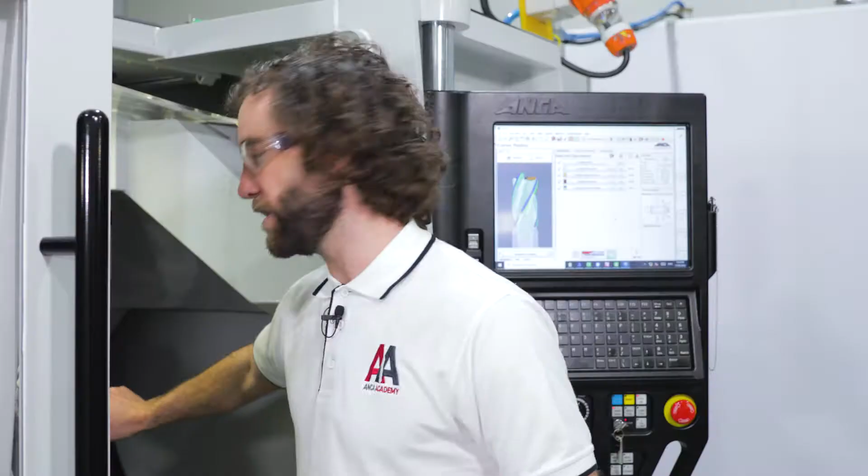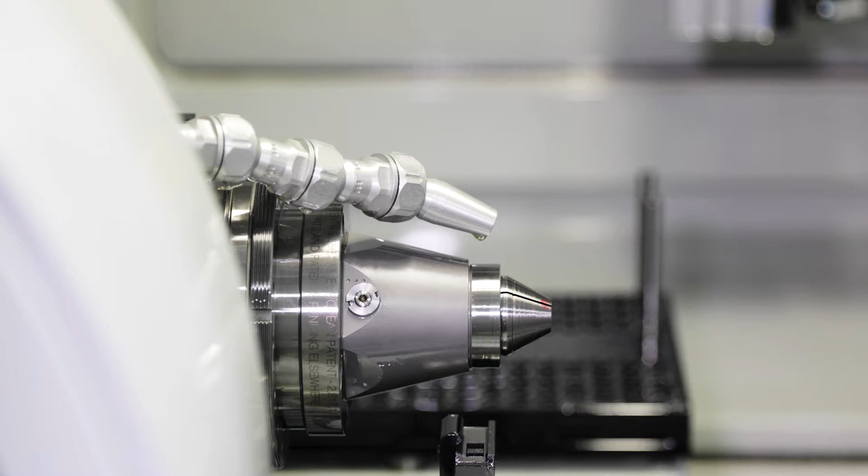The first step in our machine setup is the work holding setup. Today I'm using a W25 Premier Plus PCA collet adapter, and this is a great work holding system for grinding round tools because it gives us plenty of clamp force and also allows us to adjust out any radial or axial run out. I've already set this unit up here today, so I won't be going through that, but if you check out episode 1 of the ANCA Academy, we cover this in detail from start to finish, so I encourage you to do that.

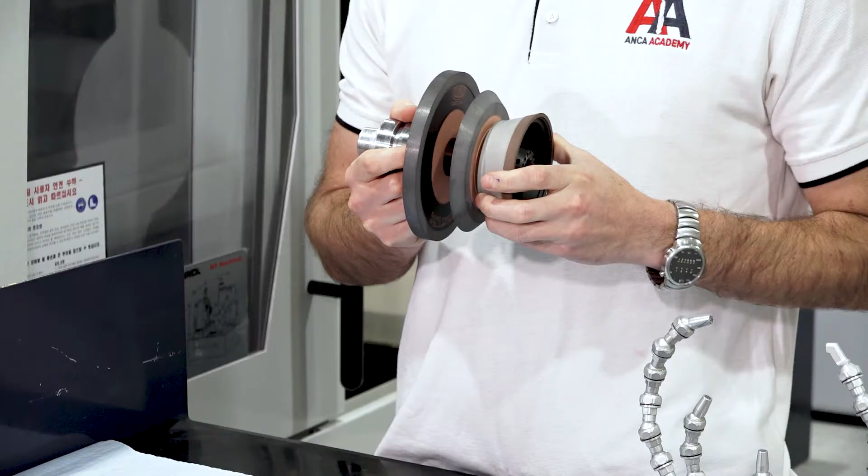Next up, wheel pack setup. I'm holding here a wheel pack very similar to the one we set up in the previous episode. It has the same wheels, the 1A1, the 1V1, and the 11V9, in the same configuration. This is a very flexible wheel pack, it can be used to grind a wide range of tool types. Today we'll be using this 1A1 to do the fluting operation and the plunge heel clearance. We'll be using the 1V1 to grind the gash, and then the cup wheel to do the primary relief on the OD and ball. This is not the only wheel pack that you could use to grind this tool. You do have several options when choosing a wheel for a given operation, but this is a very standard configuration, so that's what we'll be using today.

I'm going to leave this wheel pack here, and now we'll move over to the machine and get started designing our tool using the Wizard.

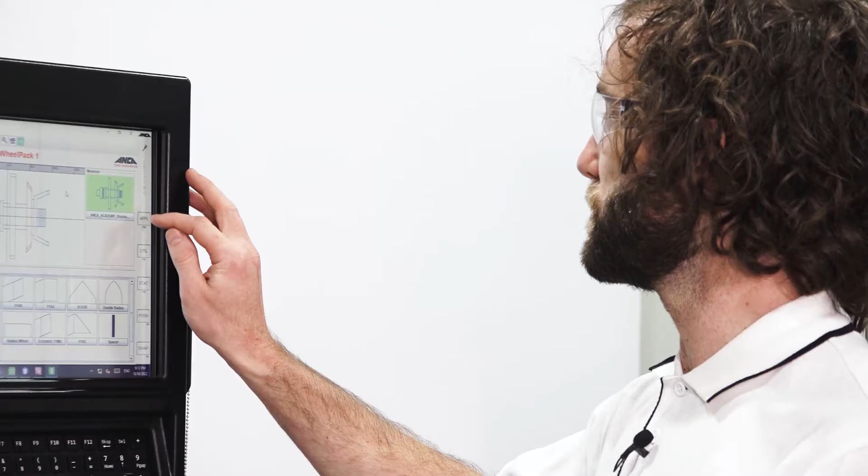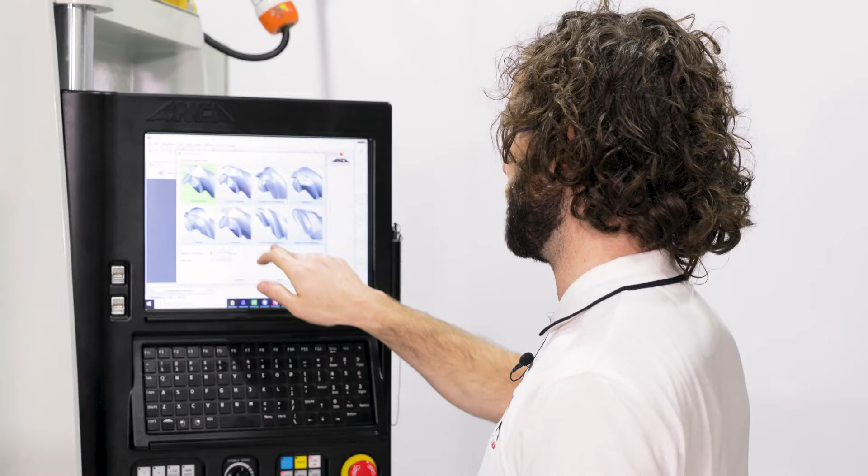Now that we have our work holding set up and our wheel pack mounted and qualified in the wheel editor software, we're going to generate our tool file using the Wizard. First, we'll open iGrind and select Create a Tool using the End Mill Wizard. To create a barrel-shaped ball nose, we actually use the oval form ball nose option. Again, 4 flutes, a 5mm radius, a 10mm diameter. We're going to be manufacturing from solid with a helix, and the material is tungsten carbide.

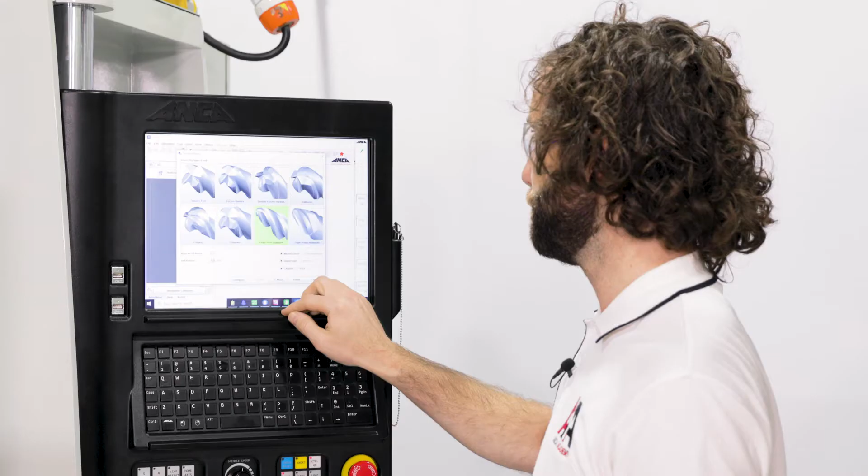Next window, this takes us to our oval form editor window. Here we can define the shape of the barrel-shaped ball nose. We have a few parameters here that we can choose to change this shape, but we'll just leave it as default.

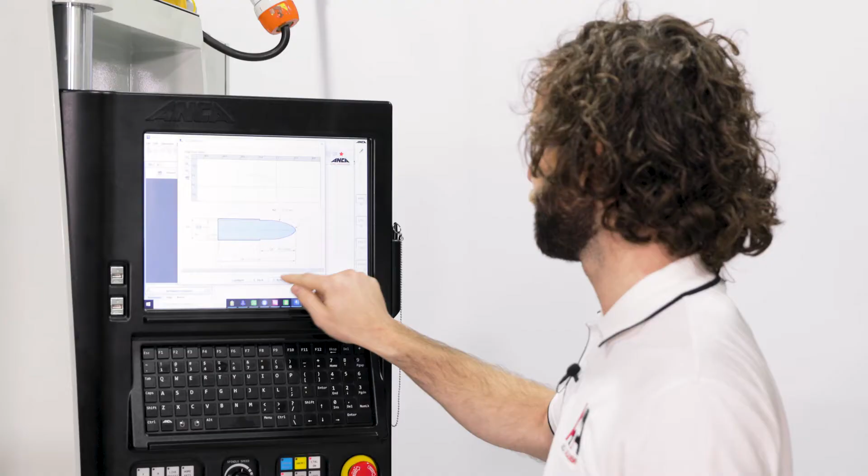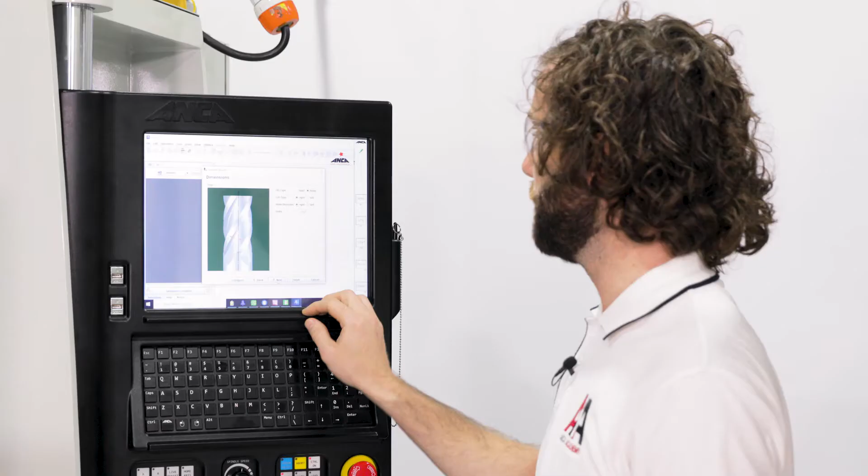Next is the end face style, much like the other end mill types. Here we're going to go with two long, two short. We have a few other options, but we'll stick with the default. Yes, it's a helix, OD, right-hand cut, right-hand helix with a 30-degree helix angle. We have a couple of other options here, unequal flute spacing and the feed rate override, but we'll leave that all as default for today.

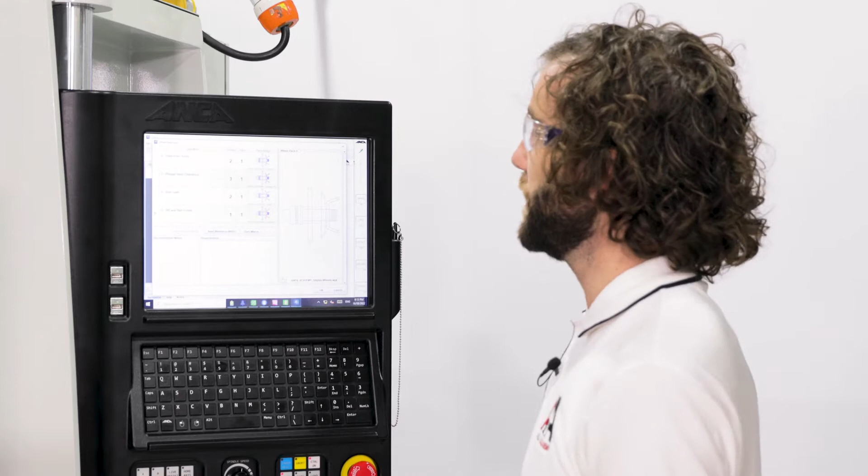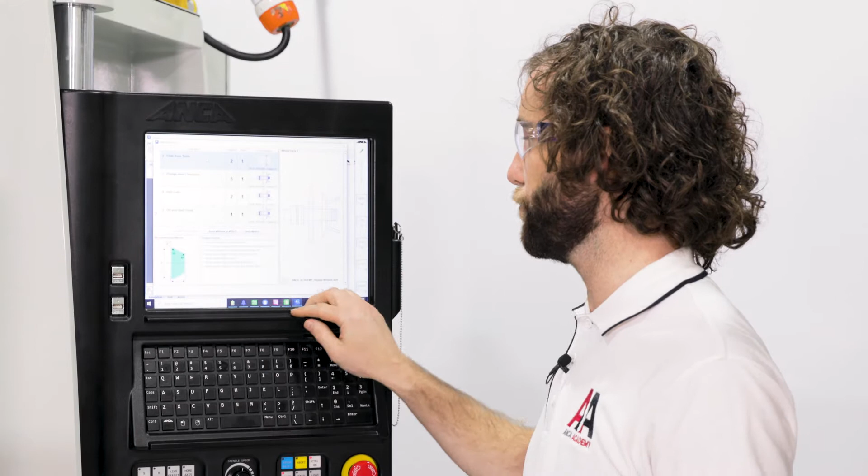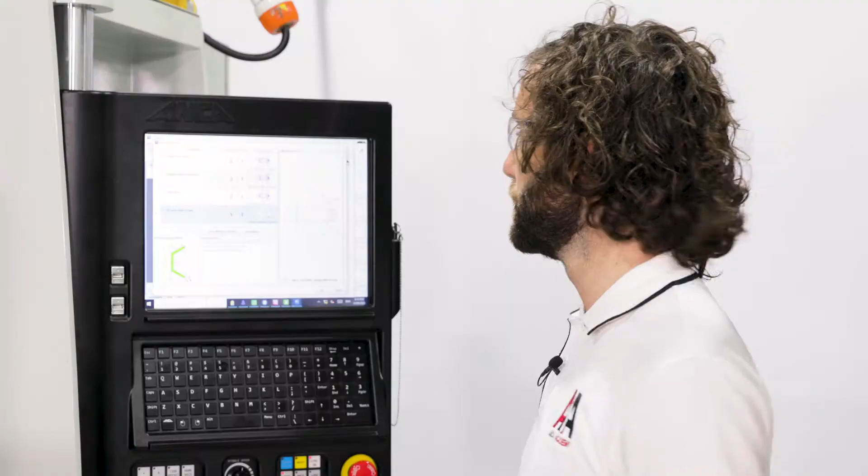Generating our tool, the next step is the wheel selection window. iGrind will automatically assign a wheel to an operation based on its suitability. For a given operation, we have a few requirements of the wheel, and it will pick the wheel that satisfies those requirements. Sometimes you might not satisfy all the requirements, and you might see for a particular operation that it's highlighted yellow. This means that although you can still grind that operation, you might end up with geometry slightly different to what's programmed. The other thing you might encounter is if it's highlighted in red. That's an invalid wheel, and you need to select a different wheel because it won't even grind the operation in that case. Here we have no yellow, no red. We've chosen our wheels well, so we'll check OK.

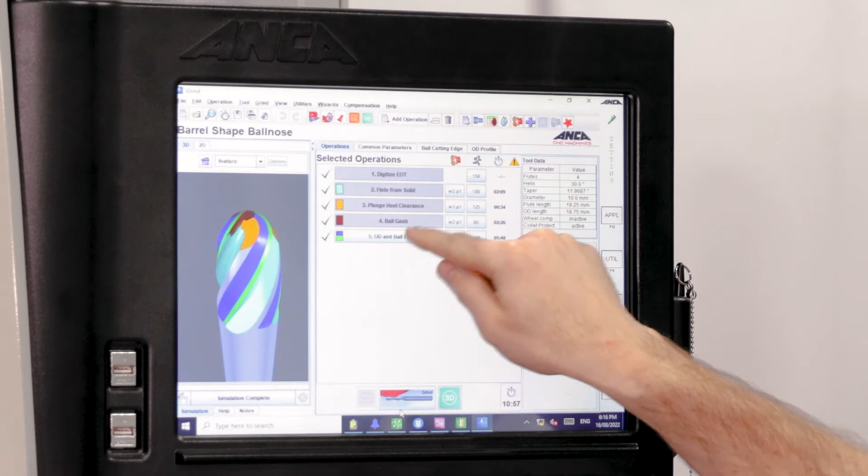OK, this is our tool file. We can see here in the simulation window what it's going to look like. To the right of that is the operation list, starting with the digitized end of tool operation, moving through flute from solid, plunge heel clearance, ball gash, OD and ball finish. Now in each of these grinding operations, we have many parameters which define the geometry for that operation. I won't go into any detail on any of the specific parameters today. We're just going to use the defaults as given to us from the Wizard, so all these parameters have been selected by the Wizard.

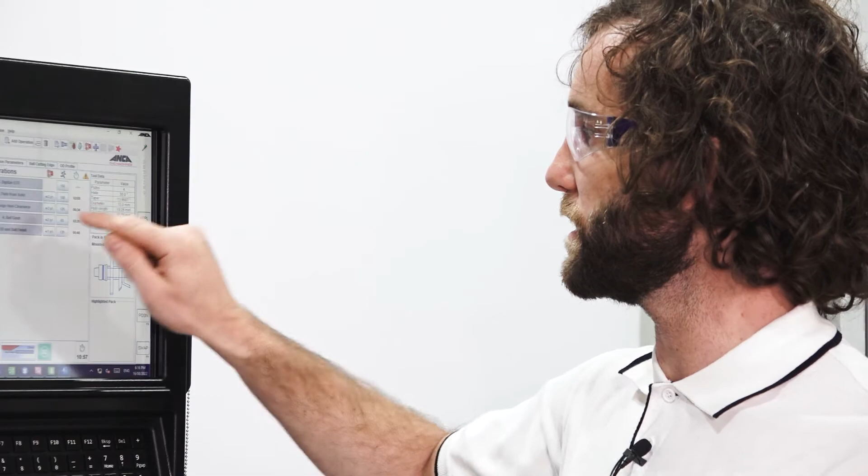So that's what we're going to use today to grind our tool. To the right of the operation list is the wheel selection. Here, for every operation, we can manually select wheels, different to what was automatically assigned in the wizard. Now, we're not going to change any of the wheels because the setup is good at the moment, but here is where you would go to change any wheels if you wanted to.

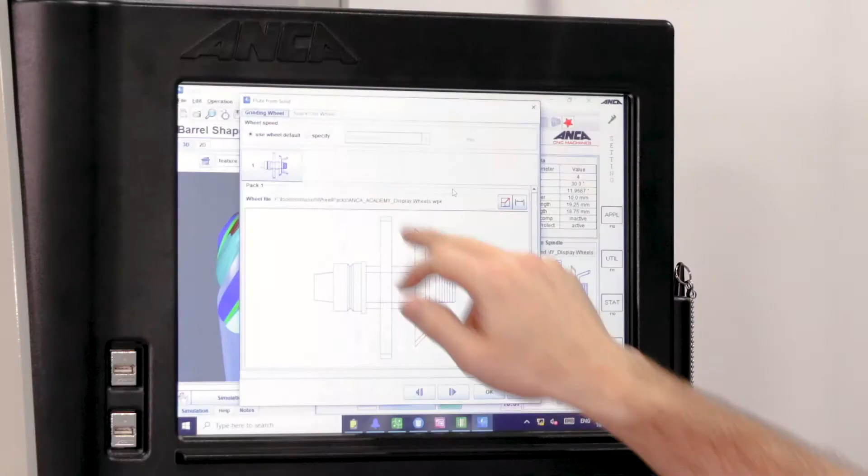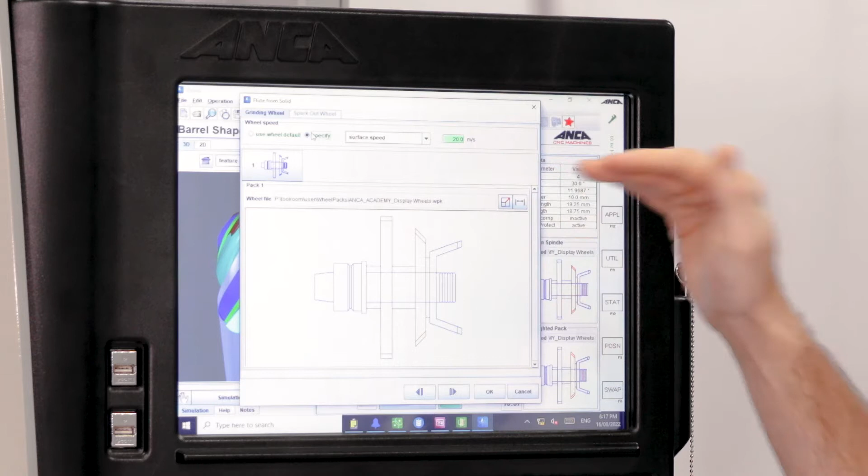Also here, we can define the wheel speed. Right now, we're taking the wheel speed using the default, which is defined in the wheel editor for a given wheel. But you can manually specify the wheel speed either as a surface speed or as an RPM. So we'll go back to the default here. And this wheel selection can be done for all of your operations.

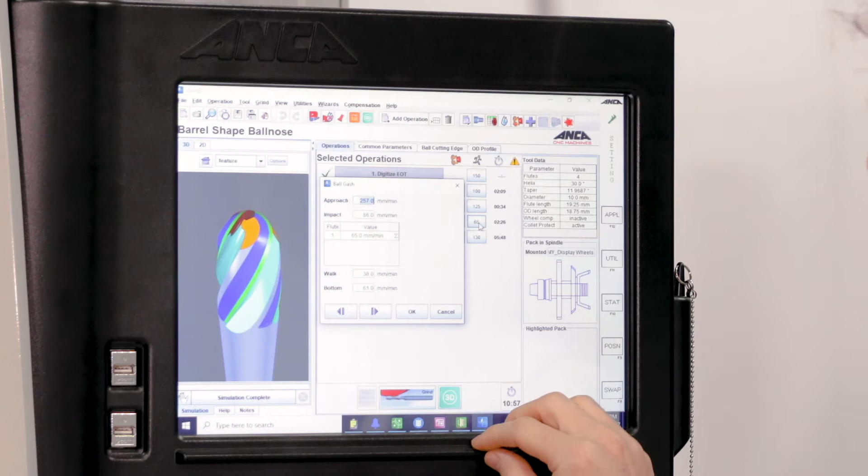To the right of this, we have the feed rate. Now here we can select the feed rate for a given operation. Some of them have more than one feed rate, for the impact or say the fluting feed rate. So it allows you to manually select the feed rate for each part of the operation.

Now all these values are selected by the wizard based on the material that we chose. And we chose tungsten carbide, and these feed rates are all sensible values for grinding tungsten carbide, so we're going to leave them. All right, that's our tool file generated.

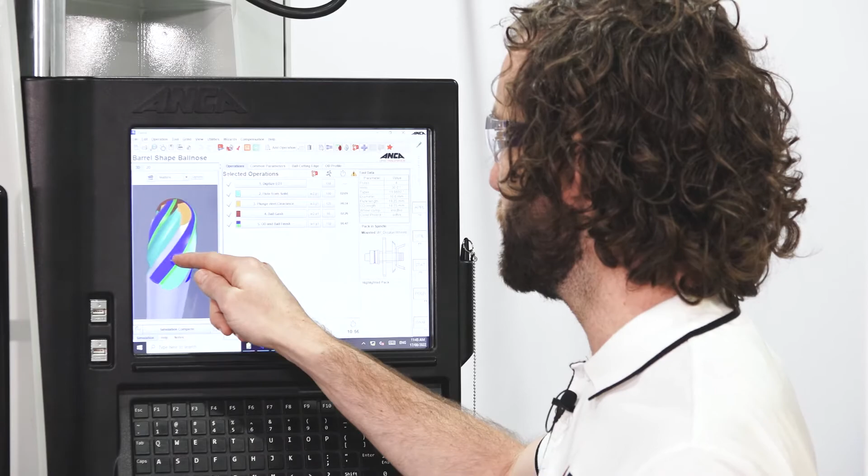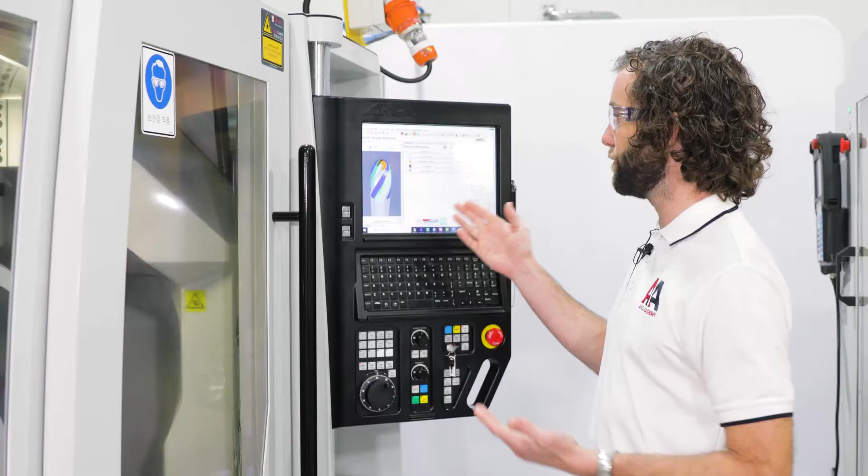Before we move on to the next section though, I'd just like to talk about ANCA's simulation software package, CIM3D. Now today we designed this tool using the wizard in the iGrind software on the machine itself. And we can see the tool that we've created here in the simulation window. Now, the tool shown here is generated using the CIM3D software and is a theoretically exact representation of the tool, assuming we have qualified all the wheels correctly. This simulation window, though, is just a viewer and lacks much of the functionality that the complete software package has.

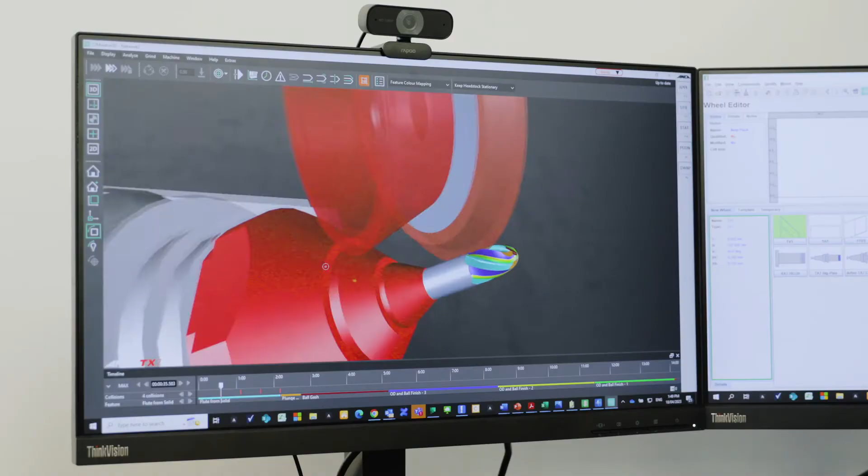For this reason, it's far more common that we would do the tool design offline on a simulator and then bring the tool file to the machine when we're ready to grind. The simulator has many features which are useful during tool design. We can do clearance checking, run through the entire grinding cycle to make sure that the wheel's not hitting the work holding or something like that.

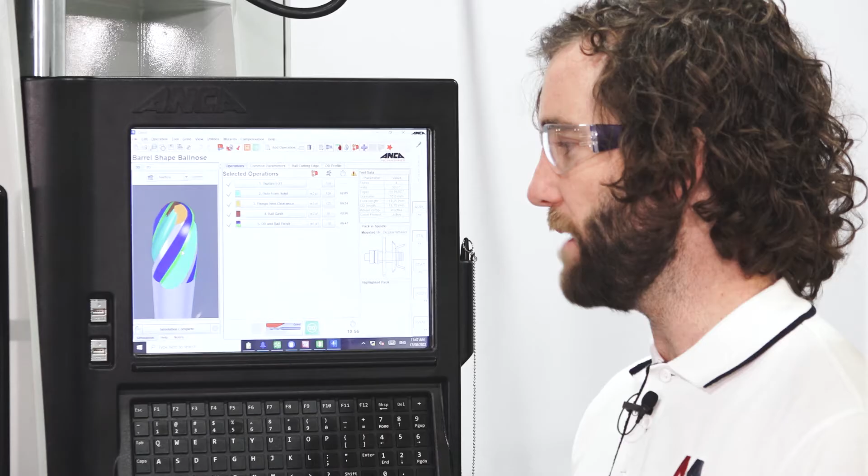We can measure geometry on the tool, like the land width or the hook angle. We can also modify parameters within an operation and instantly see the effect on the geometry, which is really helpful. And finally, we can observe the grind point for each wheel and each operation, which will be really helpful for us when we come to set the coolant pipes up, which is the next step. So let's go and do that now.

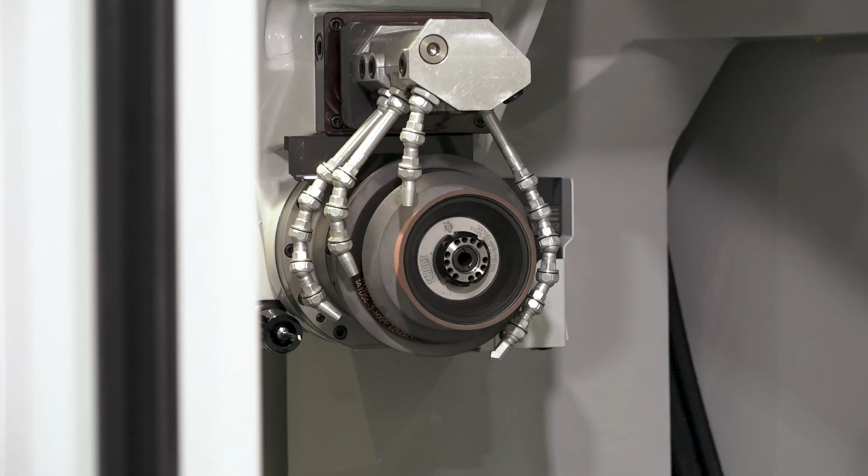The next step in our setup is the coolant pipe configuration. Now, coolant delivery is very important and will influence the grinding efficiency, the cycle time you can achieve, the rate of wheel wear, and the tool quality itself. So it's very important that we get this right.

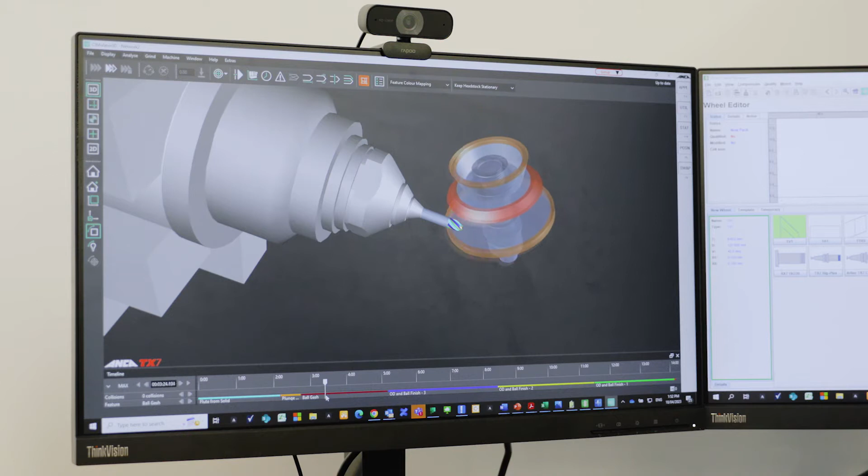One of the most important things when setting up your coolant pipes is making sure that your nozzles are directed as closely as possible to the grind point. And this is where the simulator can come in really handy, because I've simulated this tool and observed for every operation where the grind point is on the relevant wheel. So I've set up the coolant manifold here to reflect that, and I'll walk you through that now.

So the first operation is the flute from solid operation. This will be done at approximately 6:30. So this nozzle here will be shooting that point on the back toroid. The next operation is the plunge heel clearance. That is done at about 7 o'clock on the 1A1 wheel as well. That's what this nozzle will cover.

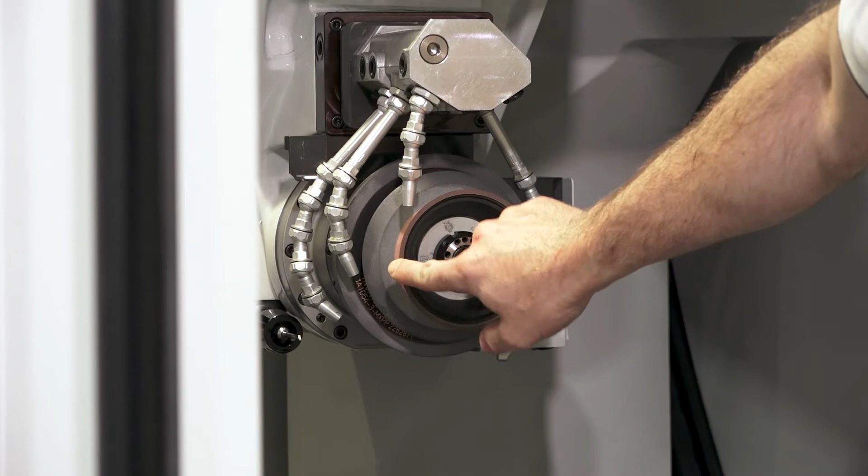The next operation is the gashing operation. Now that rolls from about 7 o'clock to 8 o'clock on the wheel, the grind point. So this nozzle here is going to try and hit both of those, but somewhere in the middle maybe. And finally, the cut wheel, the grind point during the OD ball is 9 o'clock to around about 10:30. So this nozzle here is going to be aimed at about 9:30, say.

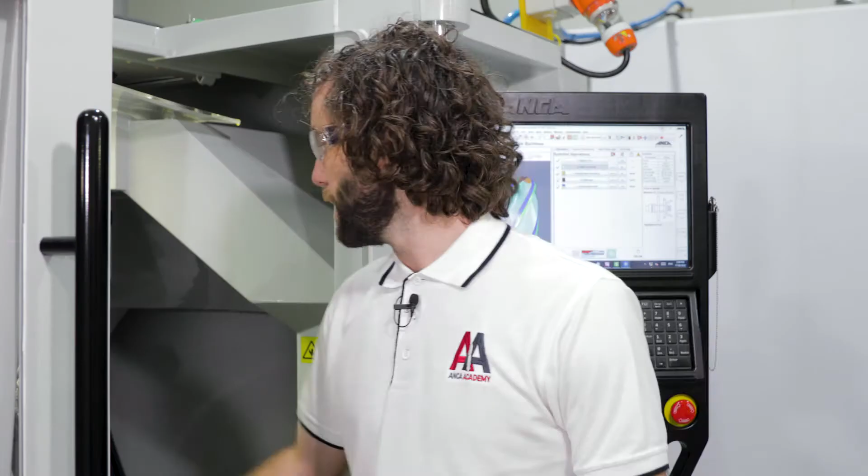It's not always possible, as you can see, to aim the nozzle directly at the grind point, particularly when the grind point is changing, such as in the gashing operation and the OD ball operation. You have a couple of options. We can set up multiple coolant nozzles on the same wheel, maybe here, one at 9 o'clock and one at 10:30. Or, and what is quite common, we'll set up a headstock coolant nozzle here, which sprays directly at the tool, and that can kind of fill in the gaps when the grind point is not quite aligned with this nozzle here.

At this stage, the nozzles are only approximately positioned. We will probably do a final tweak just before we grind our tool, but for now it's just important that they're approximately in the right position, and that's important for the next step in our process, which is the dry run. So let's move over to that.

Before we do our dry run, there's one more step, and that is to qualify the work holding system. Earlier we already set it up and trued it, but what we haven't done yet is teach the machine where the front face of the collet is, and that's what we'll do now. So we'll start by inserting a tool all the way in.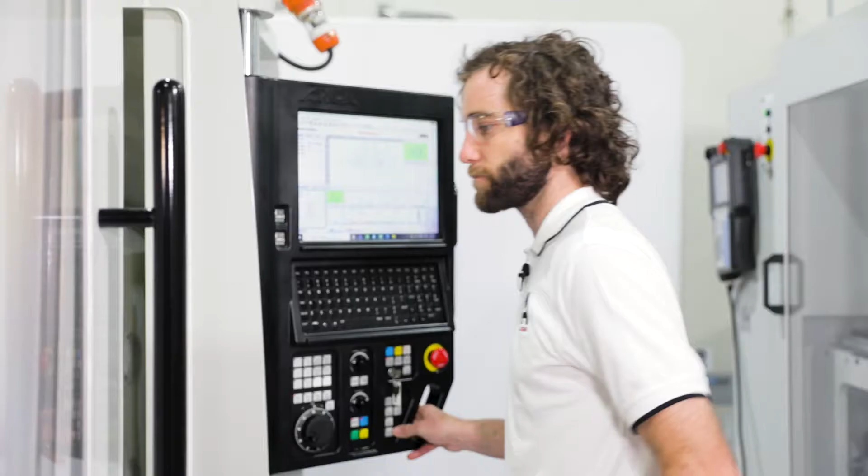We'll close the door and open the application menu, machine configurator, and this will display the active work holding system. In this case, it's already correct. We can choose from a large range of other work holding systems though, if we need. The next step is to choose the size. We're grinding a 10mm tool, we have a 10mm collet in there, so 9 to 12. And then finally, we hit digitize and apply.

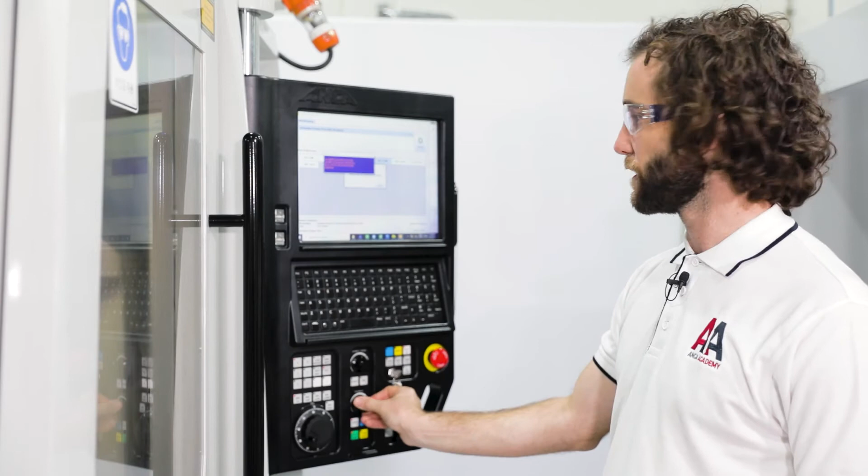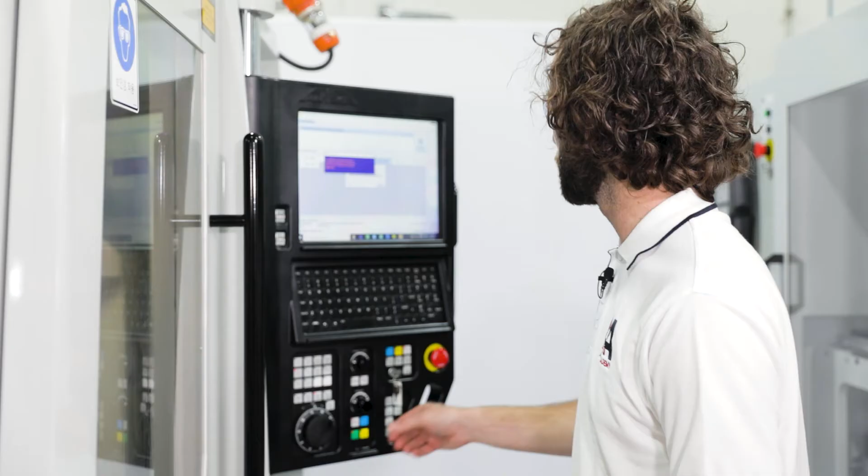Then it's going to ask us to MPG the machine until the probe is close to the collet front face here, and press acknowledge. And there we go, the work holding system is qualified.

The next step in the setup is the dry run. The dry run is a very important final step before we grind a tool for the first time. It'll give us confidence that we're not going to crash the machine, that there are no clearance issues at any point in the grinding cycle. Even if we've done a full simulation in the Sim3D software, it's still very important to do this dry run on the machine itself before we grind a tool.

That's because the Sim3D, while it will accurately model the wheel and work holding and tool, there are certain things that aren't captured, such as the coolant pipes, headstock coolant pipe, maybe some other accessories like a tool support system that wasn't in your simulation. So it's just a very good idea to always dry run as your final step before grinding a tool.

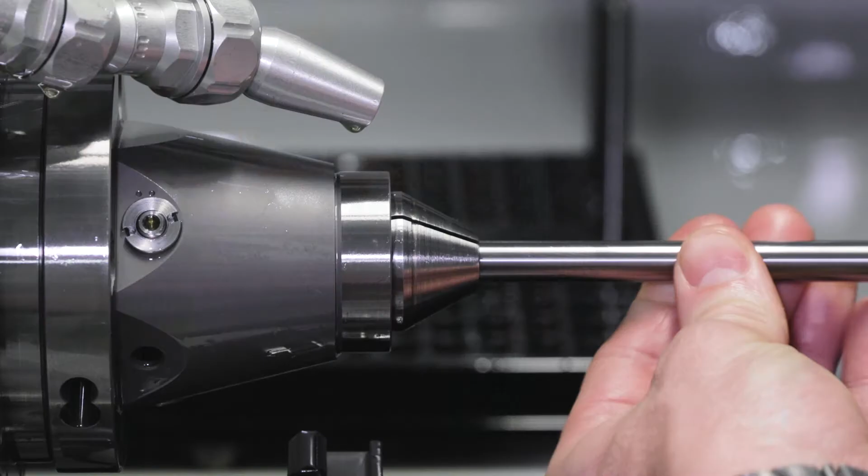We'll go through the dry run step by step, first of which is to insert your tool into the collet, making sure that the protrude length is the same as your tool file, in this case 50mm. Next we'll close the door and press the dry run button up here.

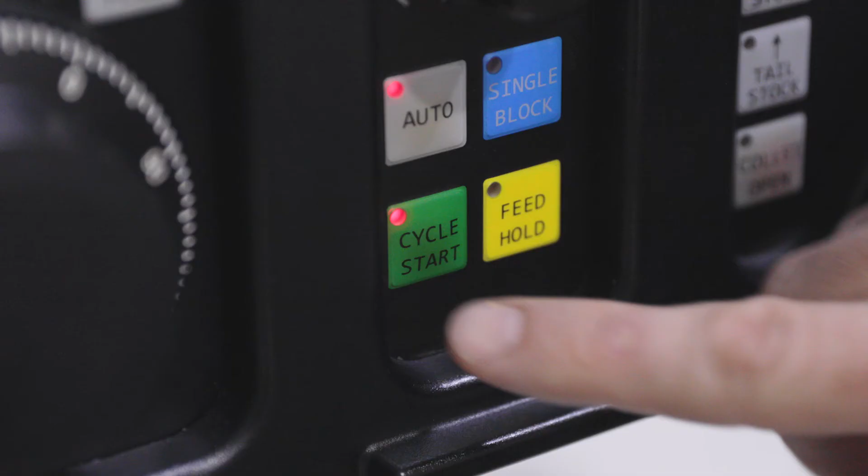So we'll press cycle start, and the first thing that will happen is it will digitize end of tool. Now it will ask us to unload the dry run tool. Rather than fully unloading it, it's better to just push the tool all the way into the collet.

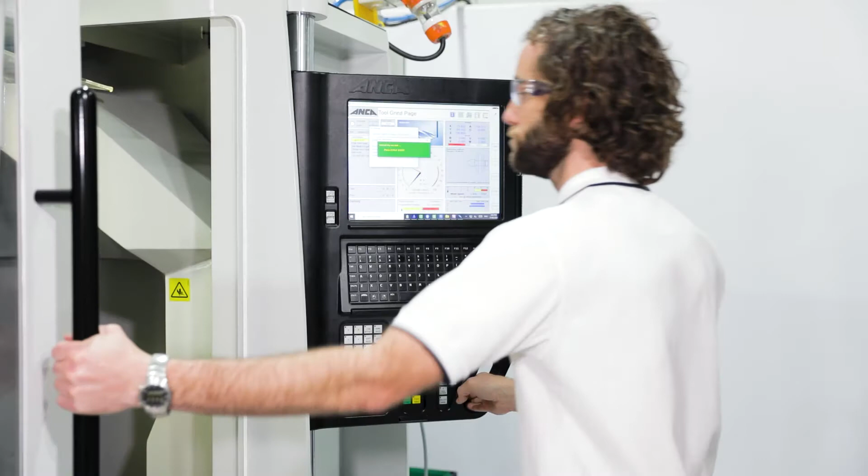Press cycle start, and now it's going to go through every operation exactly as it would if it were grinding the tool. But because the tool now has been pushed into the collet, we're not actually physically going to touch the tool. So, first operation, flute from solid.

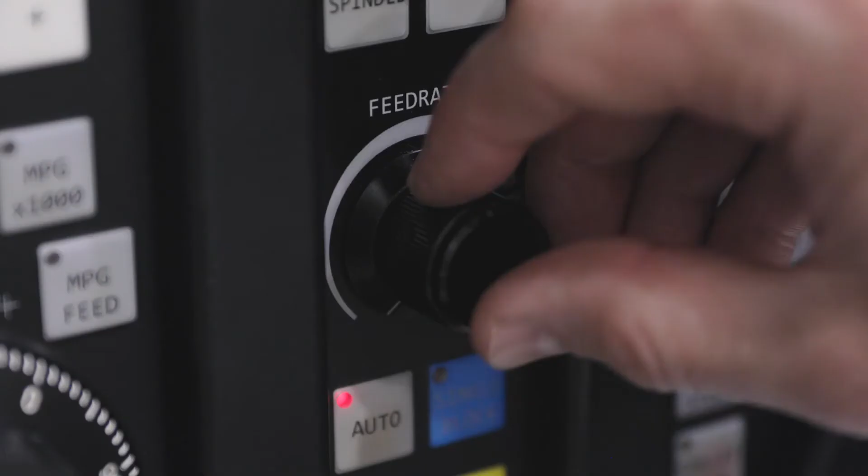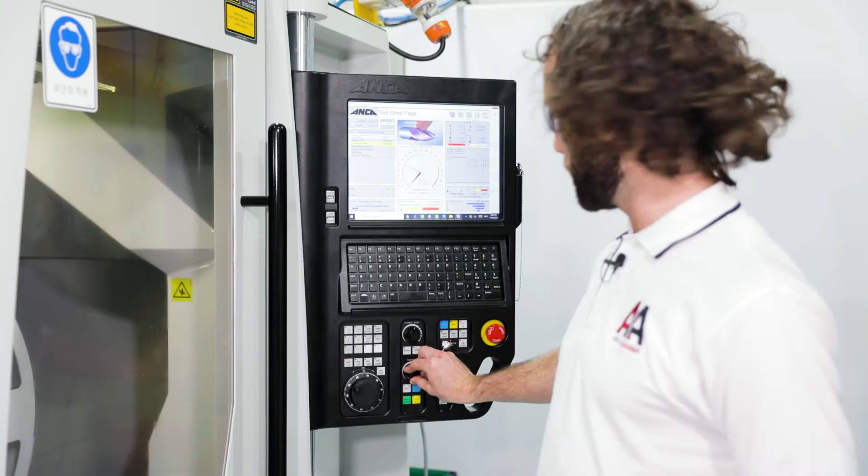We can control the dry run in the automatic mode using the feed rate pot, like normal. I think a good strategy is to use the feed rate pot right up until you have a potential clearance issue, and when things are getting very close, what you can do is kill the feed rate, open the door, and switch over to MPG mode.

Now we can use the MPG wheel to control the grinding move, and we can do it in a much more precise way. And so what we can do now, if we think we're very close, a telescopic mirror can be really handy. This will allow us to see on the back side of the wheel. Okay, yeah, plenty of clearance. So we can continue.

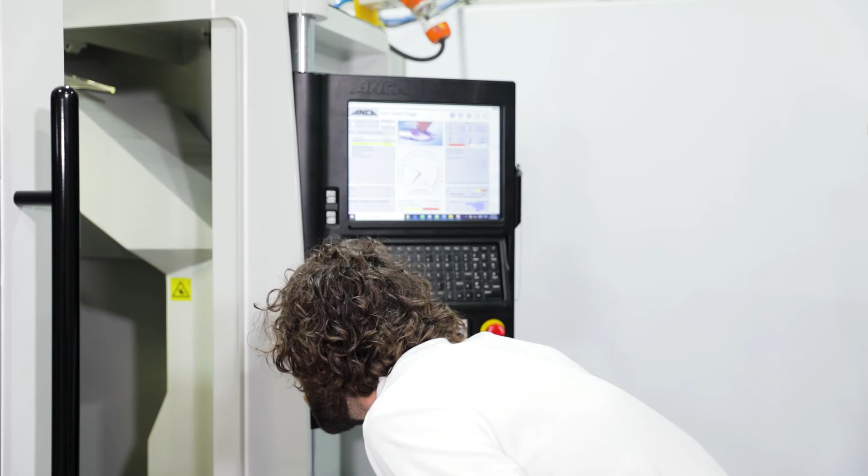Now we're on the retract move, and we've successfully dry run our first flute. So we would continue this way through all of the fluting operations, then the gashing, OD ball, and once we're happy we have no clearance issues, we're not going to crash the machine, we can be confident to grind our tool with no problems. So that's the dry run process.

So we've completed our setup, we've done our dry run, and now onto the moment we've been waiting for, we're going to grind a tool. So we'll insert our blank into the collet, making sure that the protrude length is correct.

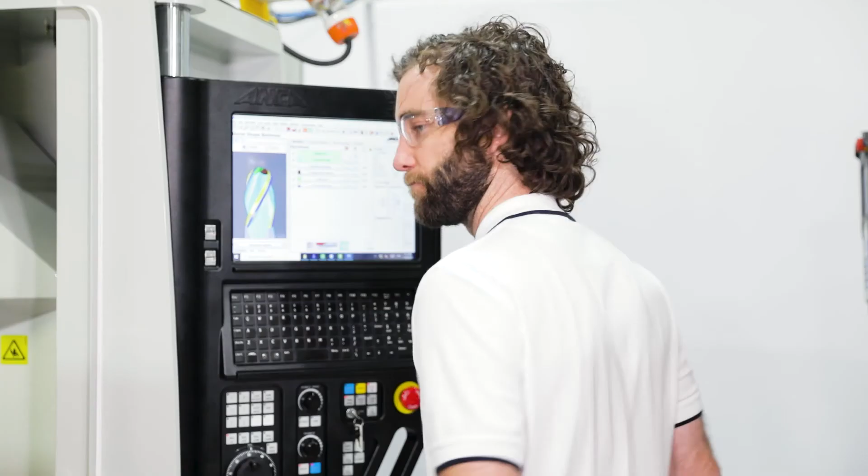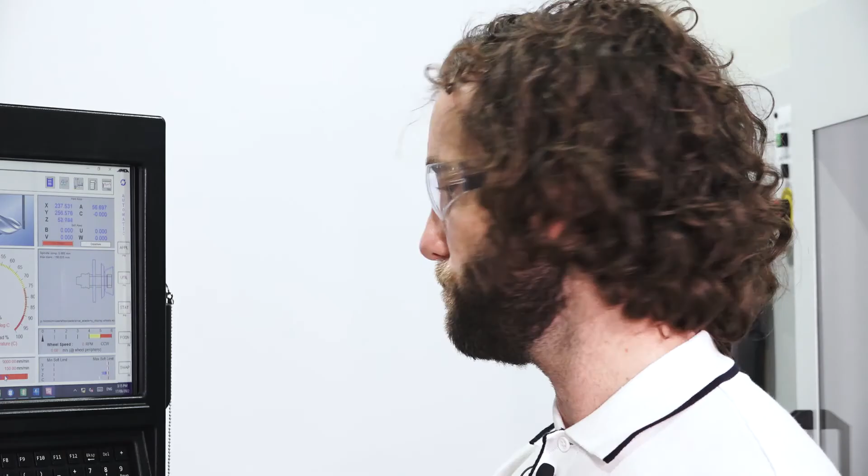Close the door. Now we can perform the digitizing operation and all the grinding operations in one hit, or we can perform the digitizing operation alone, press grind, cycle start. Okay, digitizing complete.

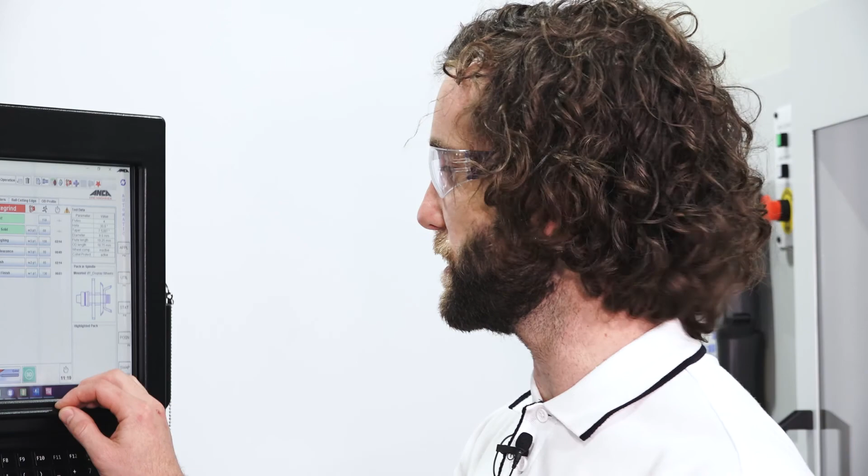Now if we press mode regrind and select all of our grinding operations, it will just apply the digitized values that we just generated. So we've got all our grinding operations selected. Now we press grind, cycle start, and we'll come back to a ground tool. That's it.